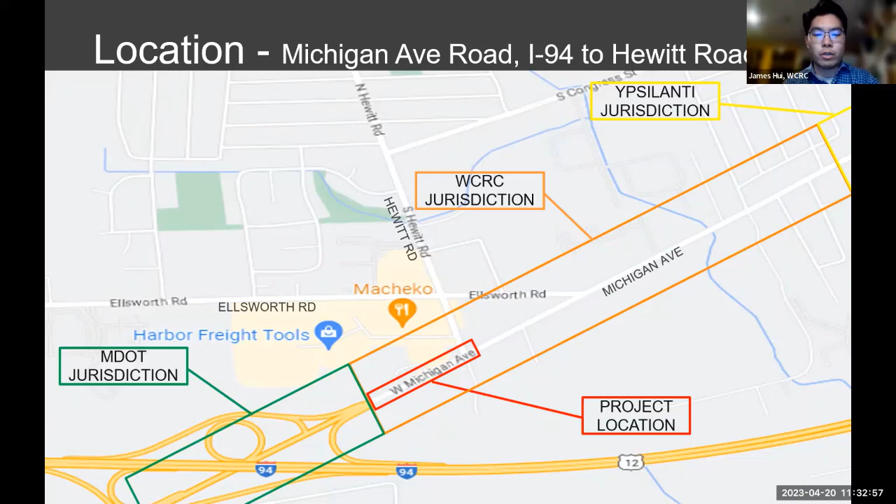So just a little background information on the location of this job. You see in the red box on the screen, that is our project limits. I'm sure a lot of you will have questions about where our limits start and end. But you can see in the green box, that's where MDOT jurisdiction is. There's a good stretch of Michigan Ave in the MDOT portion of the road that needs a lot of work as well. But for our project, we will only be working within the red box of our jurisdiction. Next page.

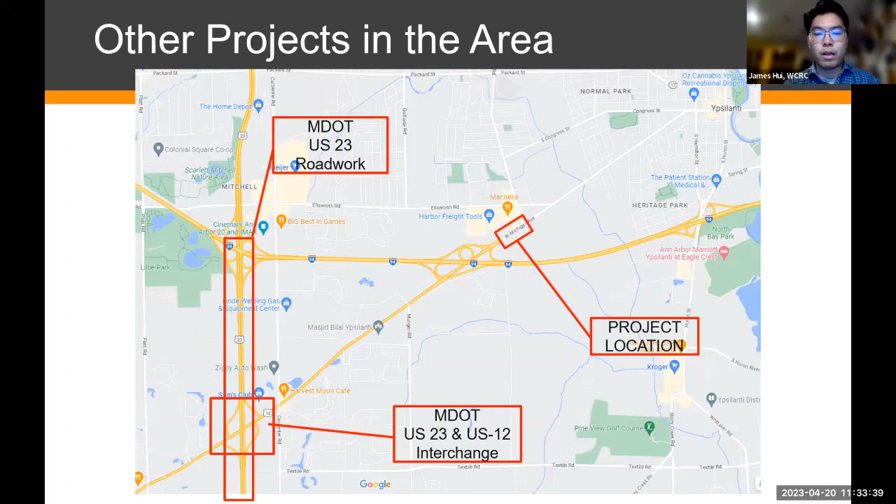And just a little recap of other projects in the area. We've been working with MDOT, the city of Ypsi, and the townships itself, coordinating a bunch of projects that are going on. The big one happening right now is the US 23 road work, and at the US 23 and US 12 interchange. I understand there's quite a bit of work here during the summer, and we're going to try our best to keep it within a time frame to get done and complete and out of your way as soon as possible for our stretch of the job. Next page.

So here's a quick snippet of the current condition on Michigan Ave. This road is made of concrete and asphalt surfacing. As you can see, and you've probably driven it, there's a lot of patches, a lot of bumps, a lot of cracks, and we're hoping to fix all of this within the county jurisdiction of Michigan Ave with this project. Next page.

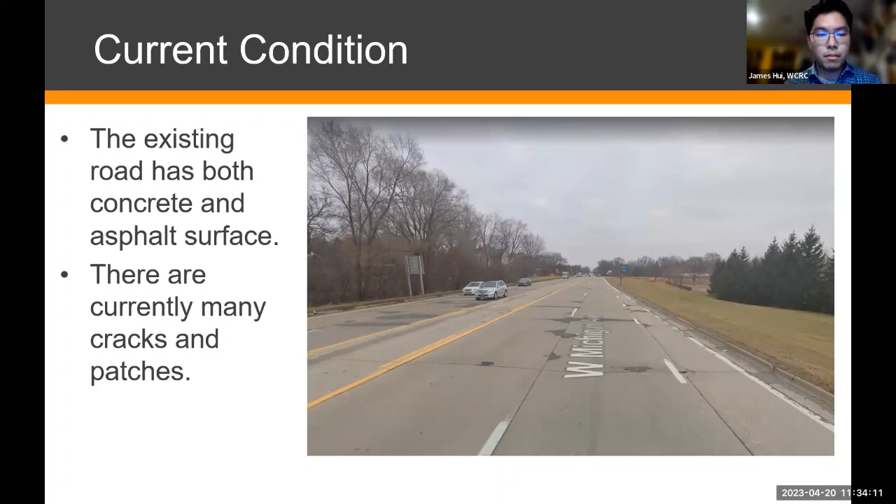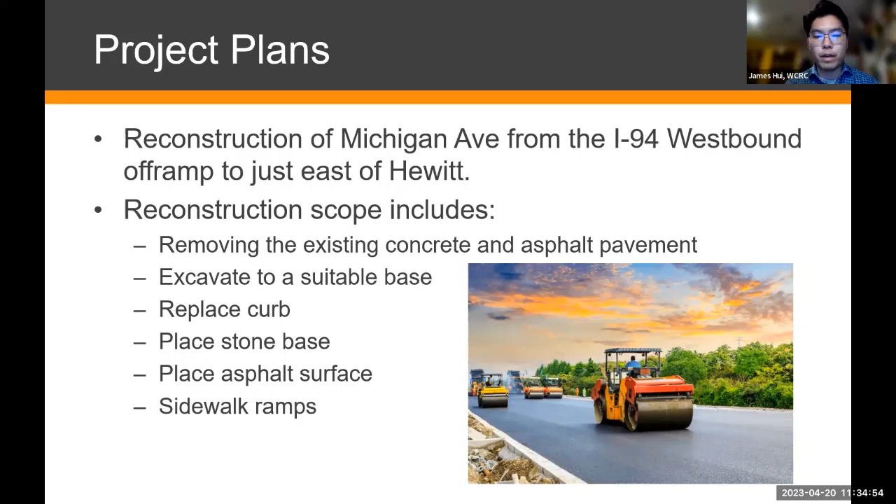So here's our plan. Our limit is from the I-94 westbound off-ramp to the intersection and just past the intersection of Hewitt. Our reconstruction scope includes removing both the concrete and the asphalt pavement, excavating it to a suitable base, then replacing the curb and gutter that's out there. We'll put back a nice thick layer of stone base, and then we'll pave it back with asphalt. There are also several sidewalk ramps at the intersection of Hewitt and Michigan Ave that will be improved and repaired to ADA standards. Next page.

So why reconstruction? Reconstruction is just one scope of work for a lot of our roads. It basically means we are digging down and removing and replacing a majority of the road material. If you look at this illustration on the right, you can see our potholes on this road are a big consideration for reconstruction. The amount of potholes and cracks is an issue based on our base underneath the pavement. For us to properly correct this issue, we would have to completely rip everything out and replace it. So that's why we considered reconstruction on this job, to hopefully fix this road for the long term. Next page.

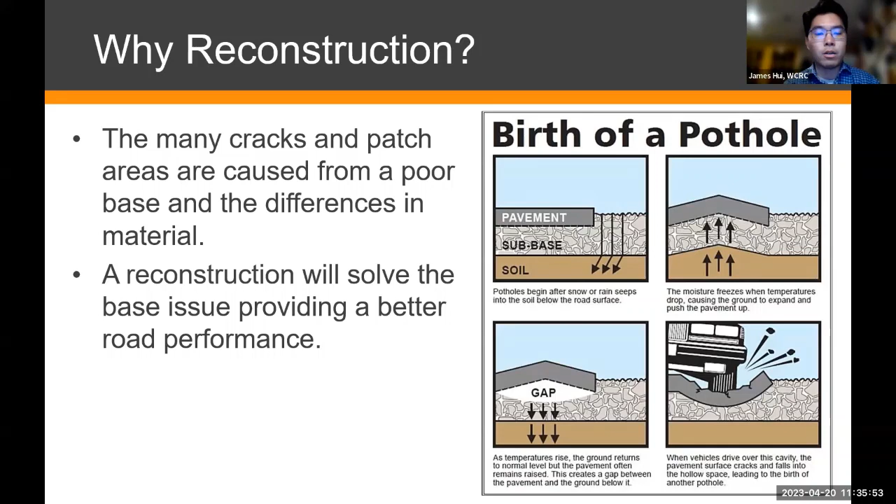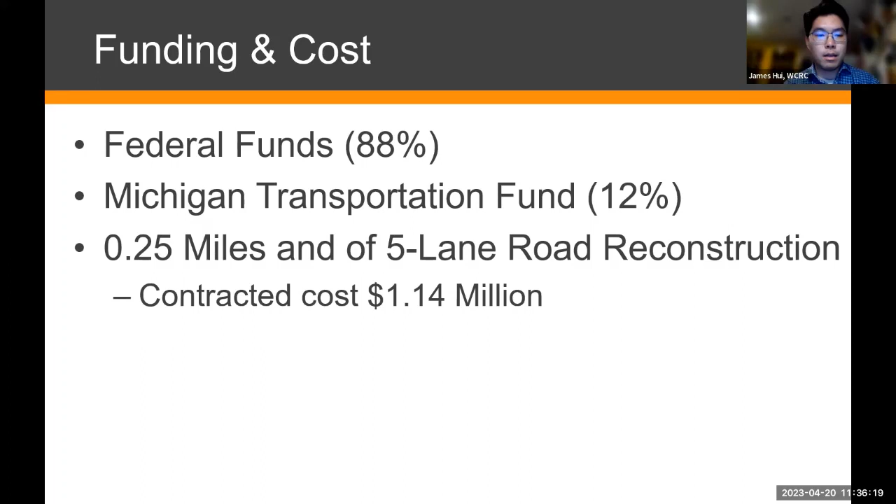So being transparent here, the money granted for this job is contracted with our contractor for $1.14 million. It's a quarter mile for five-lane road reconstruction. 88% of this is federal funding, and 12% is Michigan transportation funding. Just to reiterate, it's money we accept from the state, and if we don't use it, we don't get to use it elsewhere. So that's why we're taking advantage of this money at this time to get this job done.

Impact to traffic: Michigan Ave from the I-94 westbound off-ramp to the Hewitt Road intersection, and a little past the intersection, will be closed completely. Just revisiting the scope again, we are ripping everything out. There will be a big hole where the road used to be, so we highly advise not to move any barricades or try to drive through this area. Your average car would not be able to get in and out of this construction zone. A detour will be placed, and we'll talk more about that in later slides.

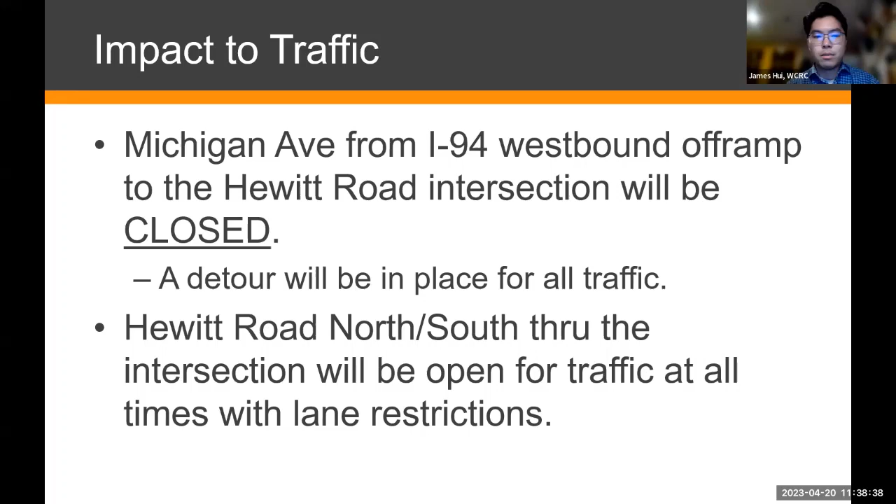Understandably, there are businesses, a daycare and preschool, and the Wendy's just south of Michigan Ave on Hewitt Road. We will be maintaining one-lane traffic in both directions throughout the entire job. We'll have flaggers on site a majority of the time, especially during rush hours of pickup and drop-off, to make sure it's as smooth as possible, but there will be an inconvenience for people trying to get to the south side on Hewitt Road. Please understand, please be patient with us. We are trying our best to make sure you have access.

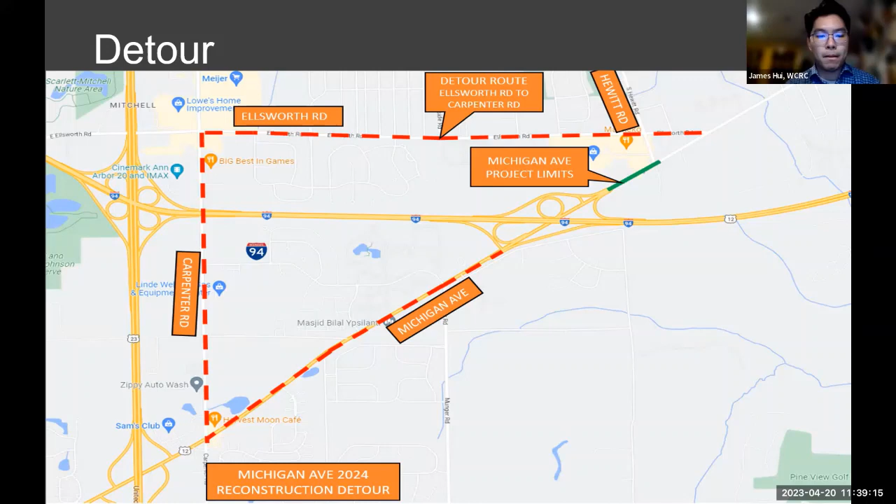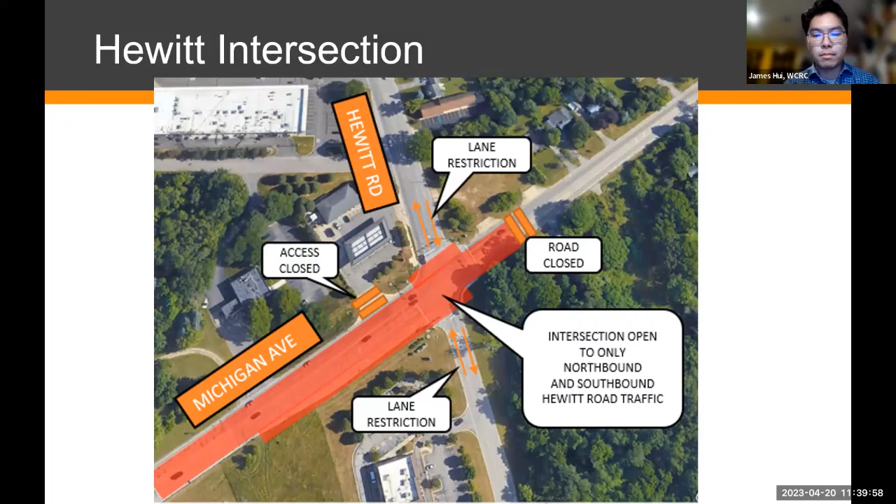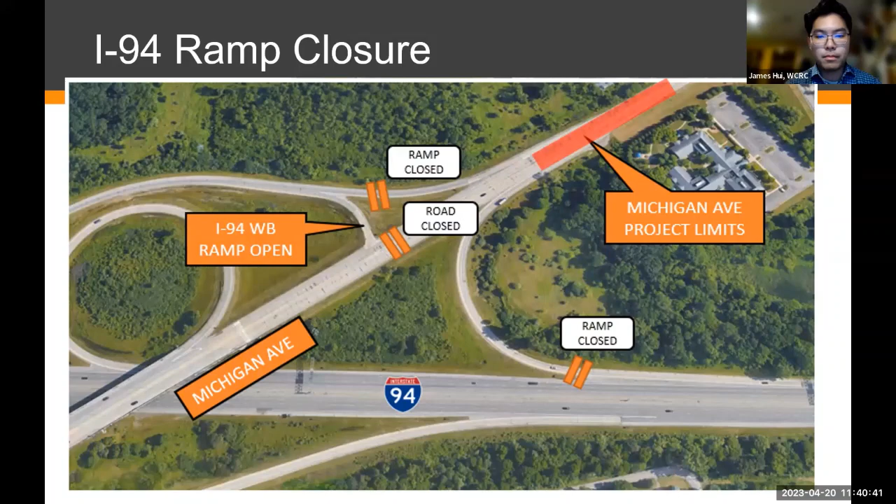Again, to reiterate, the project limits are closed. We've had a lot of issues in the past where motorists are getting out and moving our barricades, or even just running through them. This poses a lot of danger to our workers and to the motorists themselves. There will be large equipment, a lot of materials, a lot of harmful materials potentially to cars. I advise just avoiding this area as much as possible for your driving and plan accordingly. If it comes down to it, we would have to call police enforcement on these closures to help us as well. So again, please plan accordingly, drive around. We'll try to get this job done as soon as possible with as little inconvenience as possible.

So here's my contact information. It's all on the website as well. Please make sure to go online and subscribe to our project updates. We plan to update frequently, and we'll keep you posted as we move along the project. I think that's it for my slides.

Yeah, and I'll mention, James, a really well done presentation. To introduce myself, I'm Aaron Burkholtz. I work with James here at the Road Commission in the Design and Construction Department.